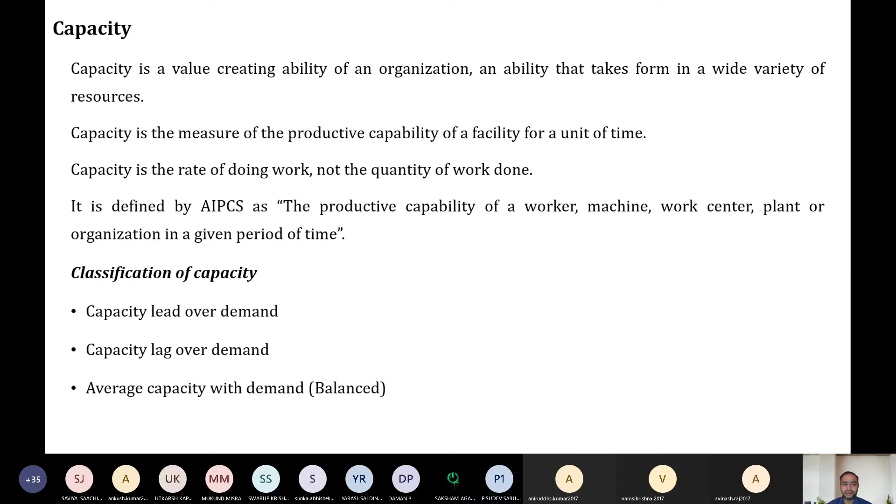But in industry, we do it as per the demand or the satisfaction of customer's order. Okay, so that's how we calculate the capacity. Then we should know about measuring the capacity. When I say measuring the capacity, there are two things we need to consider. One is called design capacity. The other one we call effective capacity.

What is design capacity? We always design some system or a machine. We expect, we know that this employee can deliver this much as the productive capability to produce something. Or we know that this CNC machine has the productive capability of producing 10,000 components in a single day, maybe a small component, or this machine can produce this many components in 1 hour. So these all we call design capacity.

Or to make it simple, we might buy a mobile phone, and we expect that mobile phone to run for 2 years without any electronic issue or any software issues. That is the minimum warranty or guarantee the company is giving. Because that product is designed to deliver its full specifications, whatever it's promised, for the next 2 years, that is called the design capacity.

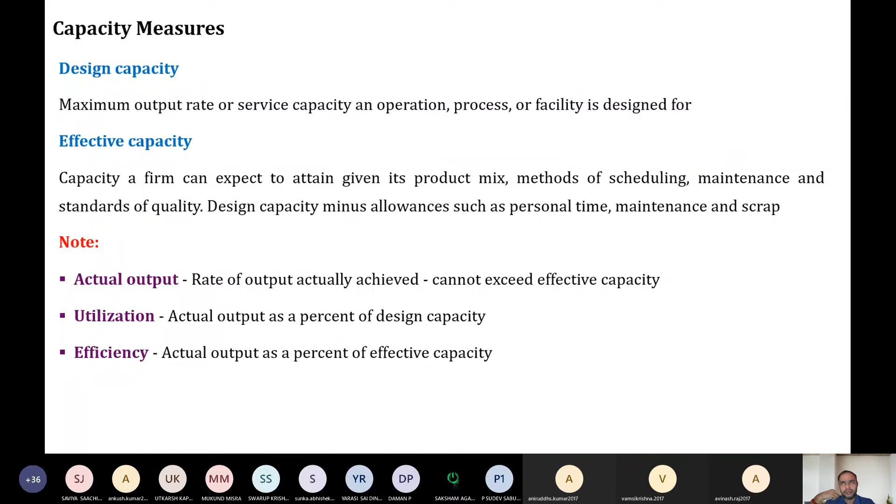So that is utilization. And utilization and efficiency, we always denote as a percentage. Okay, efficiency we say 10% efficiency, 100% efficiency, like that. Same way utilization also, you are going to tell out of this available time, this machine was utilized for so much hours. That is, the machine can perform for 8 hours, but the company uses the machine only for 2 hours or 3 hours. So that we call as utilization.

So measuring capacity can be done in two ways. One is measured capacity, the other one we call calculated capacity. Measured capacity uses the historical data which is already available. If you are measuring capacity by the historical or recorded data of previous times, we call this measured capacity. Then what is calculated capacity? Calculated capacity takes into account the available time, the utilization, and the efficiency. It is the multiplication of how much time is available, how well the machine is utilized, and what is the efficiency of the machine. Utilization and efficiency are measured in percentages.

So what is the available time? From when to when? Say for example 8 to 9. What is the time available? So 1 hour is the time available. How well this class was utilized by the students, and what was the efficiency of my students in understanding? So that we call the calculated capacity.

So I told you, utilization is measured in terms of percentage, and utilization always reflects the design capacity. Efficiency is also in terms of percentage; it is the level of performance of the machine or the worker, and it always reflects the effective capacity. Effective capacity is the design capacity minus all the allowances.

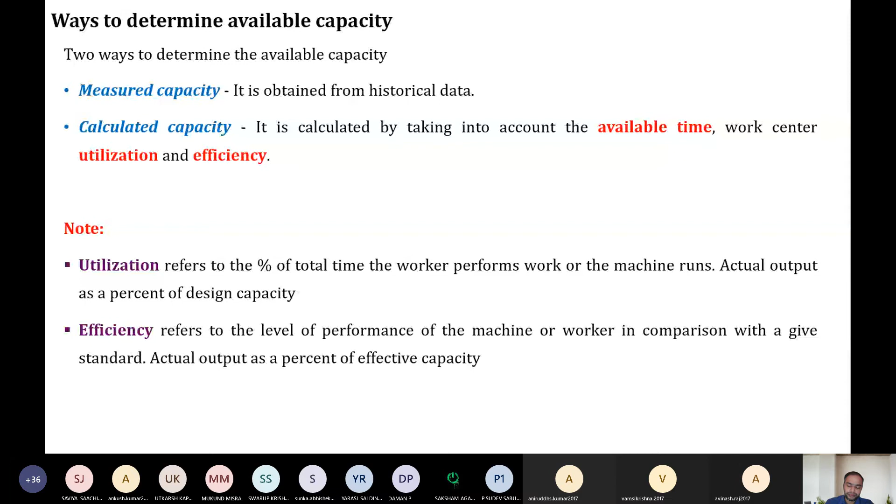Please note these formulas. We will be looking at some six formulas in this class, which we will be using for solving problems. We'll take some problems to solve. You need to understand these formulas. So the capacity is what? The number of machines or workers working in the particular organization, how many shifts they are working, the utilization of the machine or the worker, and the efficiency of the machine and the worker. When you multiply everything, we get the capacity. Rated capacity or calculated capacity is the available time into utilization into efficiency, with utilization and efficiency in terms of percentage.

Standard hours is the setup time plus the run time per piece into the number of pieces. That is how much time you take to set up the workpiece. For example, in a lathe machine, how much time you consume to mount the tool on the tool post, and to mount the workpiece on the lathe. That is setup time. Then how many pieces you are going to produce using the particular machine, into the machining time. Machining time is from when the tool touches the workpiece till the tool disengages from the workpiece; that we call the run time per piece.

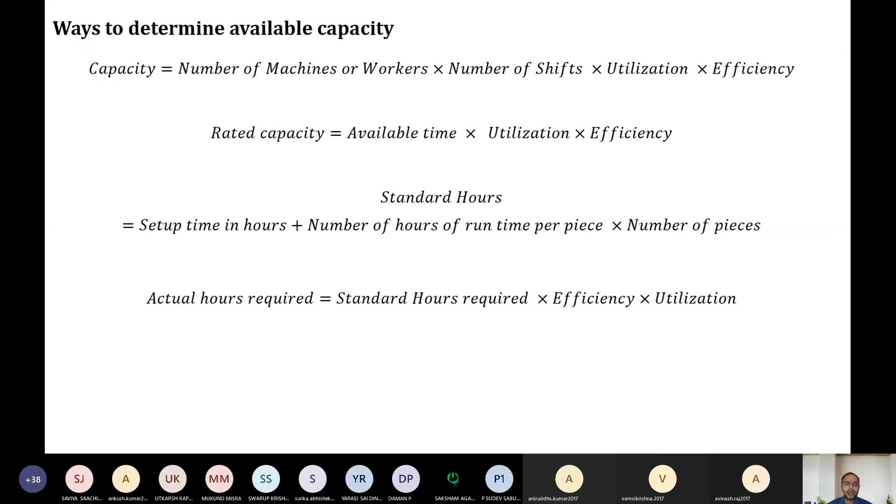So the time taken to machine one workpiece into the number of workpieces, plus the setup time, we call the standard hours. That is the complete time taken to manufacture one particular product. Then what is actual hours required? That is going to be standard hours, nothing but the available time, into efficiency into utilization. We call that actual hours required.

Then to calculate efficiency and utilization, we have two formulas. Efficiency, I told you, is the reflection of effective capacity, and utilization is the reflection of design capacity. Efficiency is how well a facility or a machine is going to perform. The formula to calculate efficiency is actual output divided by effective capacity. Whereas utilization is measured as actual output divided by design capacity.

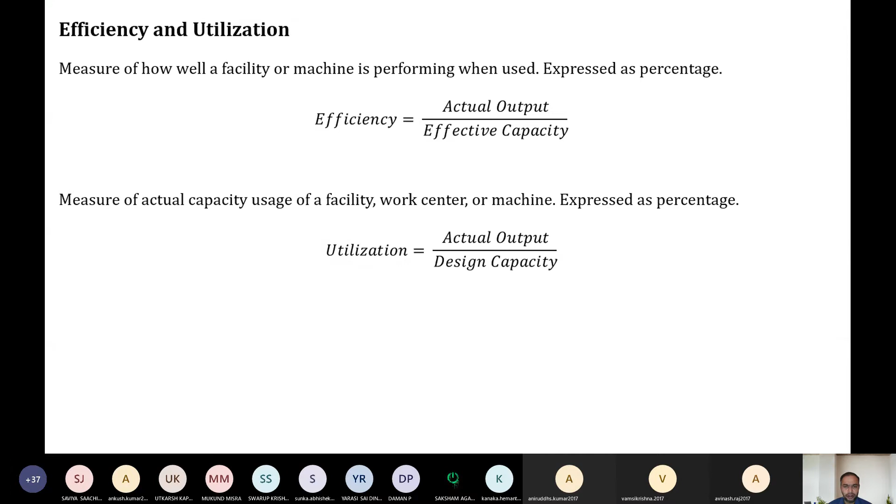Efficiency is the reflection of effective capacity, and utilization is the reflection of design capacity. So we have this formula: actual output divided by effective capacity for efficiency, and actual output divided by design capacity for utilization. Note down these formulas in parallel, and if you know them, we can solve the problem.

Imagine a company that can handle 50 trucks per day through its logistics agency. But the effective capacity is only 40 trucks per day, because 10 trucks may be under repair, punctured, or something else could happen.

The actual output is calculated as 36 units per day. So what is the efficiency? We know the formula: actual output by effective capacity. The actual output is only 36 units per day, so that's 36 divided by 40 trucks, which is the effective capacity.

So we have 90%. To calculate utilization, again we use actual output by design capacity. Here 36 trucks is the actual output, and the design capacity is 50 trucks per day, so the utilization is going to be 72%. This is how we calculate the efficiency and utilization percentages.

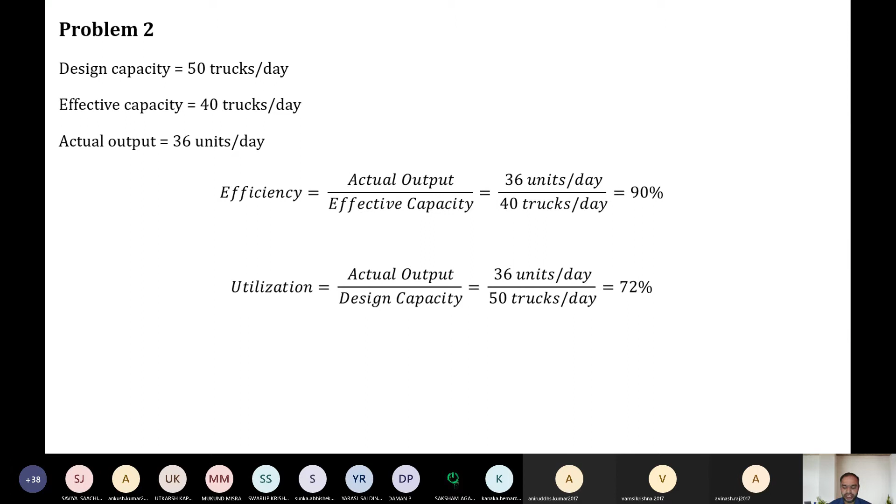Next we will discuss capacity planning. What is capacity planning? It's similar to material requirement planning, but here I use the word resource planning. This is not about material requirement, it's about resources - how I'm going to plan my resources prior to the need, when some resources are required to continue to manufacture a product.

Capacity planning is done in different ways at different time intervals. Understand that capacity planning is done at every phase of product development or manufacturing, at different levels or time durations. Basically, capacity planning is the process of determining the resources required to meet the priority plan - we prioritize something and plan the resources required for that activity, and that's capacity planning.

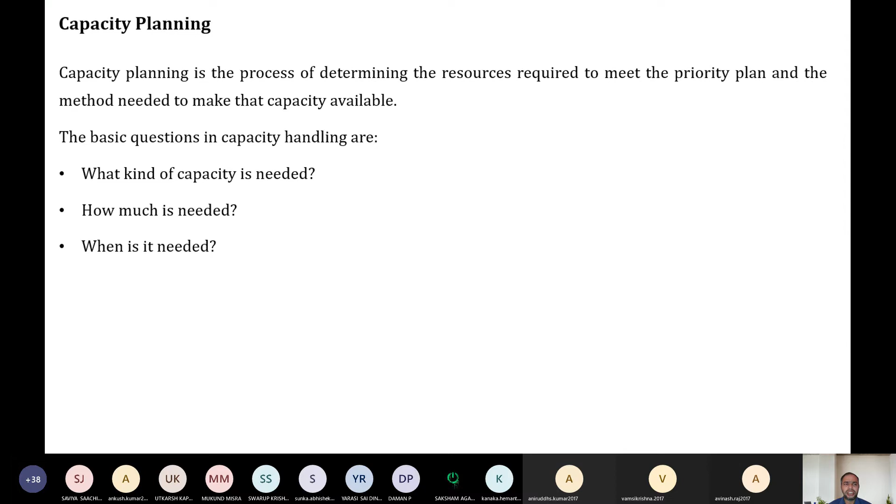What kind of questions should you ask before going for capacity planning? We should know what kind of capacity is required or needed for the particular task to be completed. Then we should know how much is required and when it is needed. So: what is needed, how much is needed, and when it is needed - these are the three questions we should ask while doing capacity planning.

Then we should know about load. Before entering into capacity requirement planning, we should know about load. What is load? Load is the required capacity of a system, or the resources needed to produce a desired output in a given time period.

Here we mean, for example, the machines - machines require something in order to perform. If you want effective utilization or effective efficiency of a machine, we should give the machine some load. So what is load now?

Load can be the power required for the machine, or the raw material required, or sometimes the efficient worker or labor being deployed there. So the resources required for the machine to deliver its 100 percentage is called load. If you want to prepare a student very well, you should load him with all the knowledge and facilities so that he will be able to give a good output. Equipping the machines or the labor with full resources is called loading.

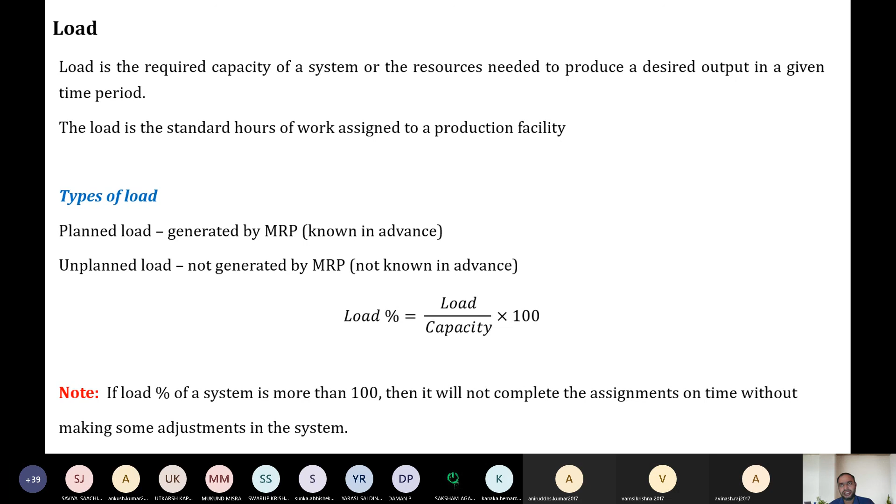So a machine can be loaded up to 100 percentage, but not more than 100 percentage. When you overload, what happens? Everything gets collapsed. So that is about loading.

In the next class, we will discuss capacity, planned loading, and unplanned loading in detail. We'll see about capacity management and capacity requirement planning in the next class. For the next class, please be ready with calculators to do some problems also.

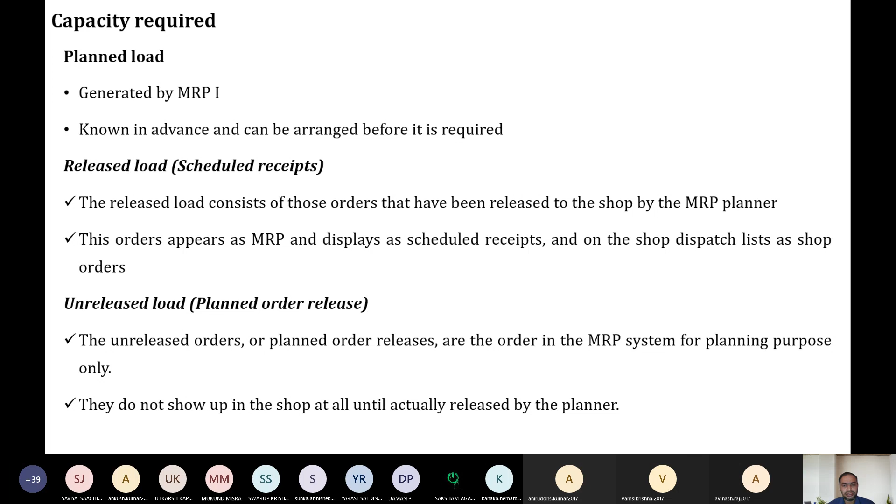Okay, so when I started the class...